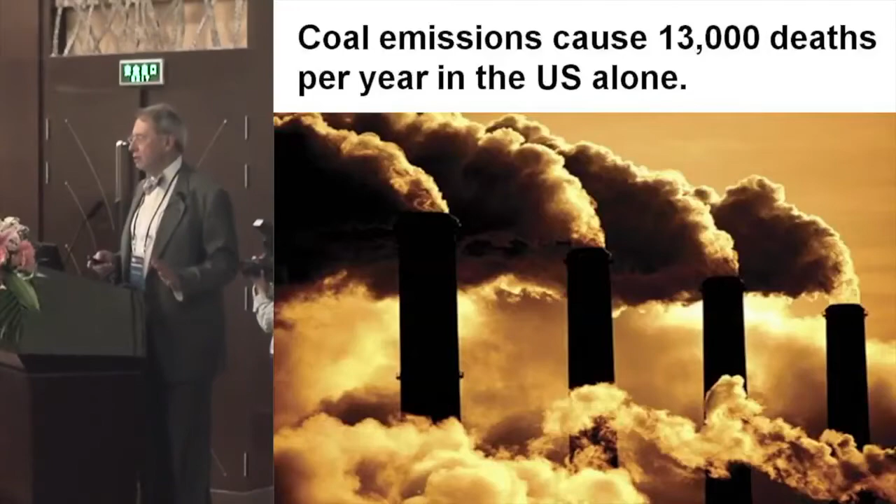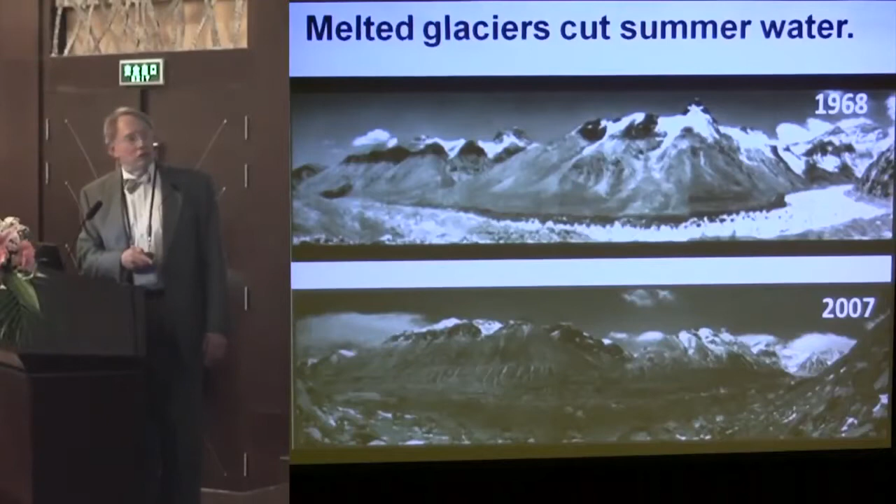One of the problems with global warming that I find the worst is the lack of food and water caused by the melting of glaciers. Glaciers normally retain water in winter and release it in summer, but the rivers fed by the Rongbuk Glacier are now becoming less able to provide water during the summer. Without water, growing food is next to impossible.

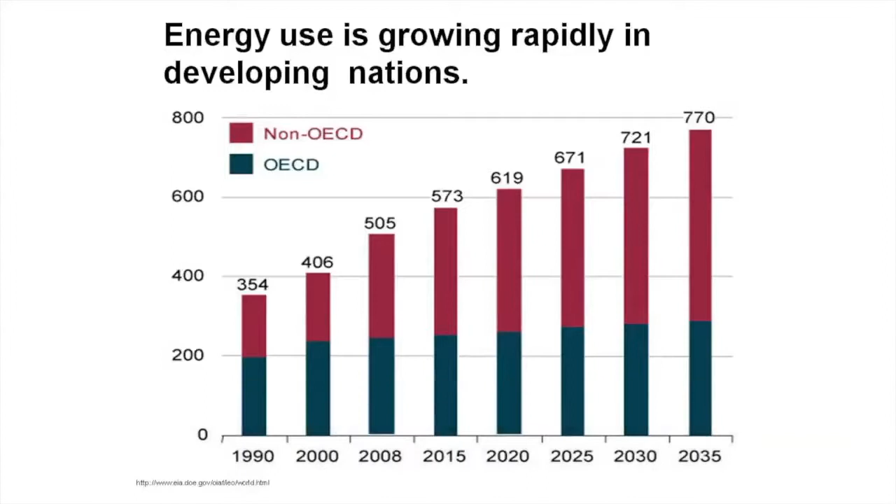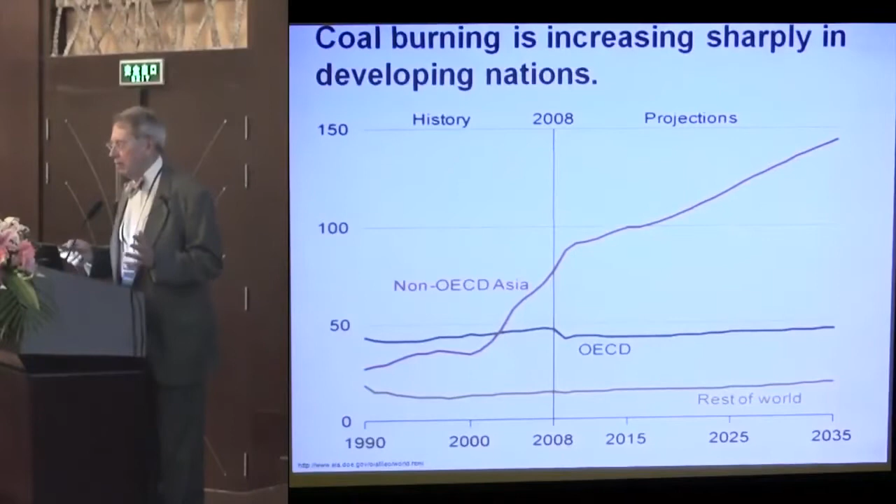All the developing nations know this. They wish to increase their energy use. And so you see the non-OECD nations are projected to have the most growth in energy over the next few decades. How are they going to do it? They're going to do it by burning coal, because they don't have money to build $5 billion nuclear power plants. They will use the cheapest energy source available to them because they desperately need that electric power.

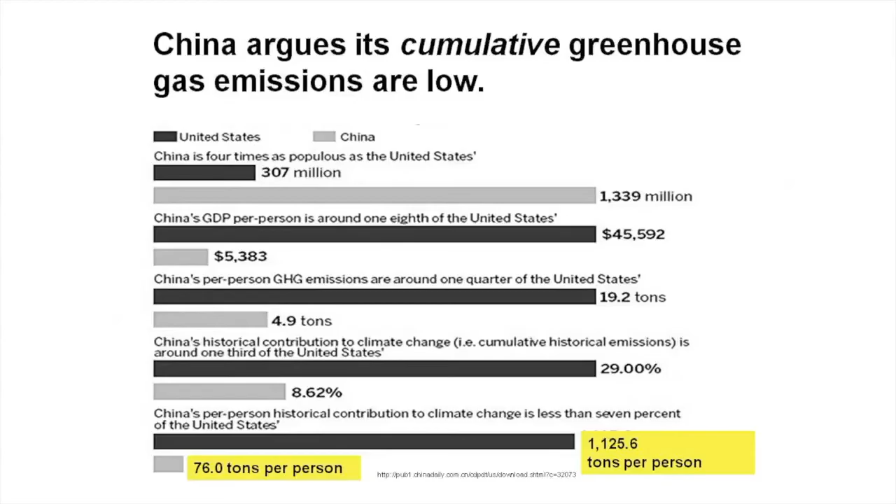Technology is required to solve this problem. They also argue against carbon taxes. Here's that same chart magnified. They point out that cumulatively in the US, we are responsible for about 1,000 tons of CO2 per person, whereas in China it's less than 10% of that. And so the developing nations argue that the West gained its prosperity by cheap energy, by burning coal and emitting CO2, so why should the developing nations be denied that right?

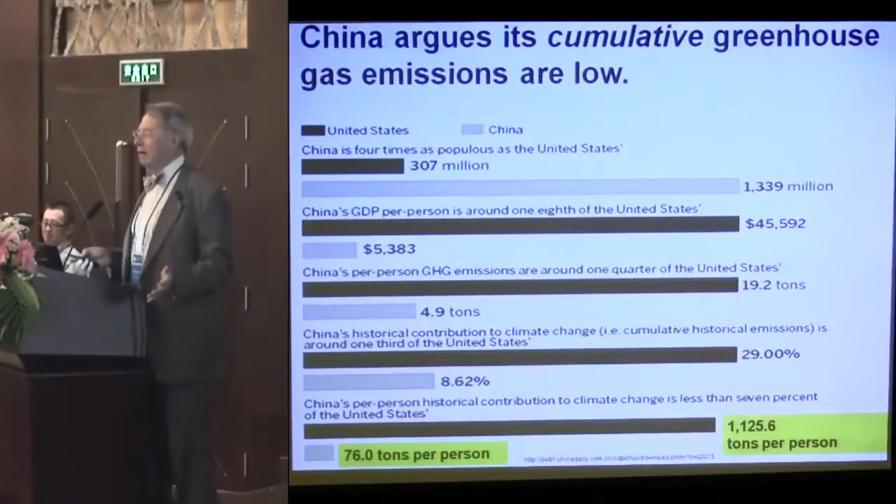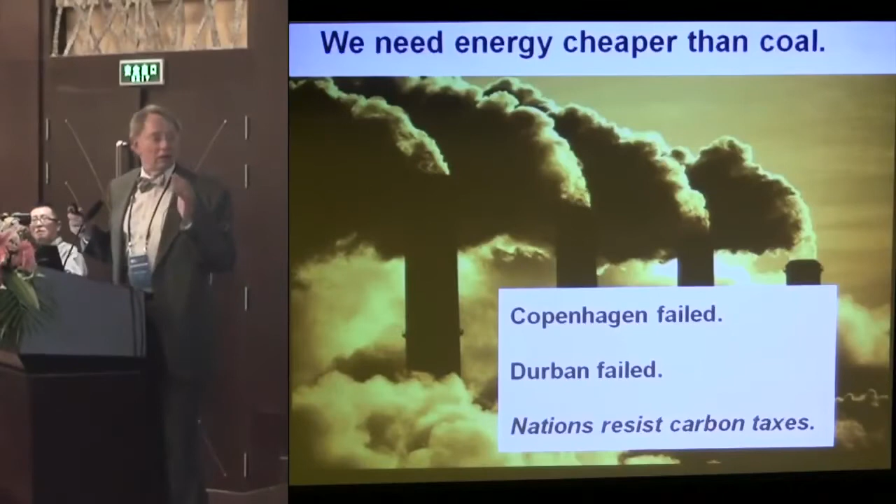It's not fair. I'm not trying to make that argument—I'm trying to point out that it's impossible to reach agreement on such a contention. So we tried anyhow. We had conferences in Kyoto, in Copenhagen, in Durban. Do you know 30,000 people went to the conference in Durban to negotiate a climate treaty? Well, how can 30,000 people agree on anything?

How can 7 billion people in 250 nations in the world agree to impose taxes on carbon that is against their individual economic self-interests on behalf of the whole world's stability? It's not going to happen.

So let's look at the cost of electricity from coal and other sources, because there's also a green movement that wants to replace coal. Here's the cost of coal: about...

$2.8 per watt of generation capacity is the capital cost for coal. In this talk I use a single model throughout, using the financial idea that if you do capital cost recovery at an 8% cost of capital over 40 years, operating a plant 90% of the time, you get 2.8 cents per kilowatt hour. So it's easy to remember: $2.8, 2.8 cents. That's the capital cost.

The fuel cost for coal is about $45 a ton delivered to the plant, which adds about 1.8 cents. So in this model, the cost of coal for a typical US plant is about 5.6 cents per kilowatt hour.

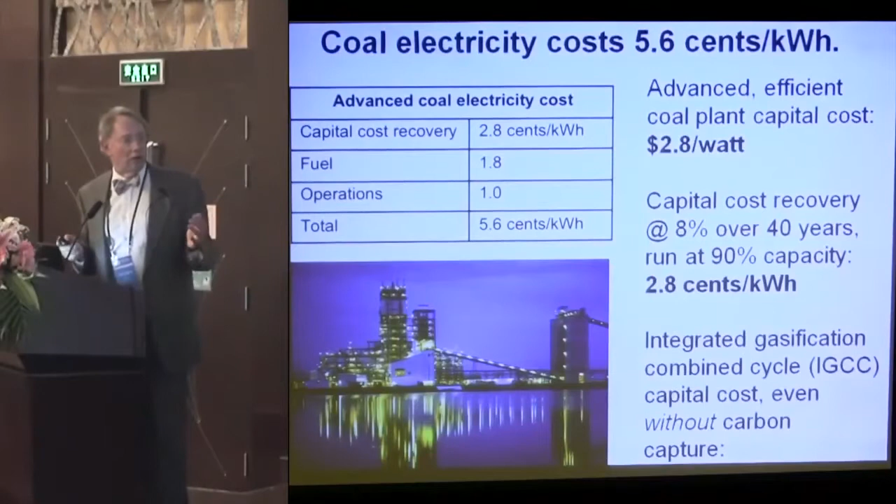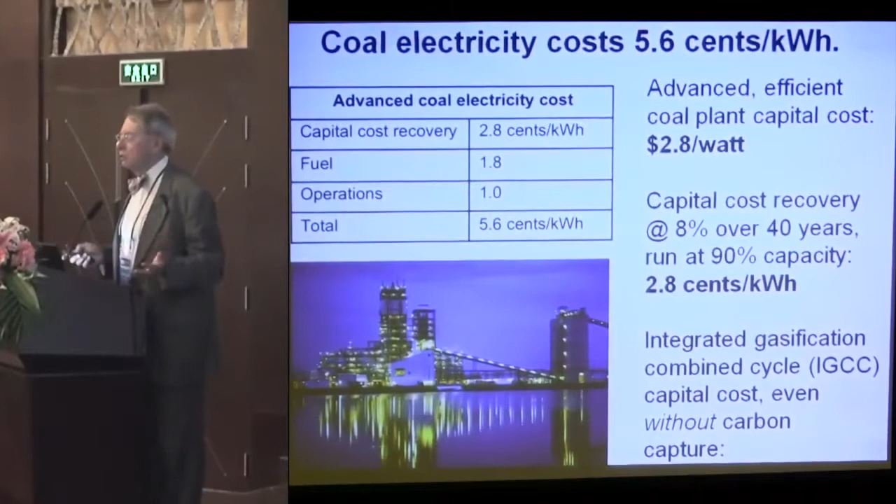Now people are saying, well, we have better technologies like integrated gasification combined cycle gas plants. These are coal plants that burn coal in oxygen rather than air, so the effluent is only water and CO2, and the CO2 can be extracted. But only one of these plants has ever been built in the US. That very pretty picture is the one in Florida.

And it's expensive. Natural gas is another interesting energy source. First of all, if you were going to do the best job you could, you would use a combined cycle gas turbine, which has a 60% efficiency of conversion from thermal power to electrical power. Buying such a thing costs about $1 per watt for capital costs.

I used fuel costs at $5 per million BTU to come up with a fuel cost per kilowatt hour of 2.8 cents. Our operations costs are standard in this model, and that comes to about 4.8 cents per kilowatt hour. Now, the cost of gas right today is a little lower than that, and if that were to persist forever, we could have a low cost of power from natural gas of only 3.7 cents.

But actually, we don't use combined cycle gas turbines very much. We only use natural gas combustion turbines, and that would mean it would be about 7 cents. So those are the bogeys we want to deal with.

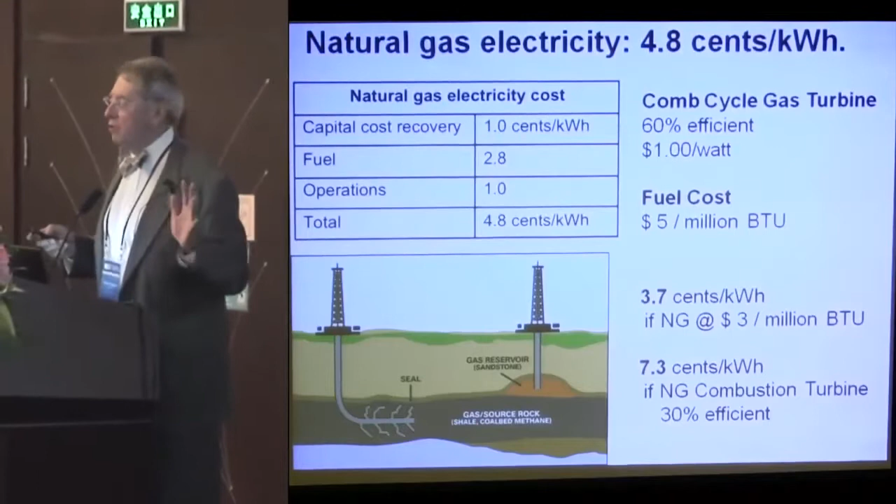Here's the reasons that natural gas prices will rise. Here's the prices of natural gas worldwide: in Louisiana, about $3; in Japan, about $16. Japan is importing liquefied natural gas more and more because they've shut their nuclear power plants down, and it has changed their balance of trade from a positive number to a negative one. So that really can't persist for long periods of time.

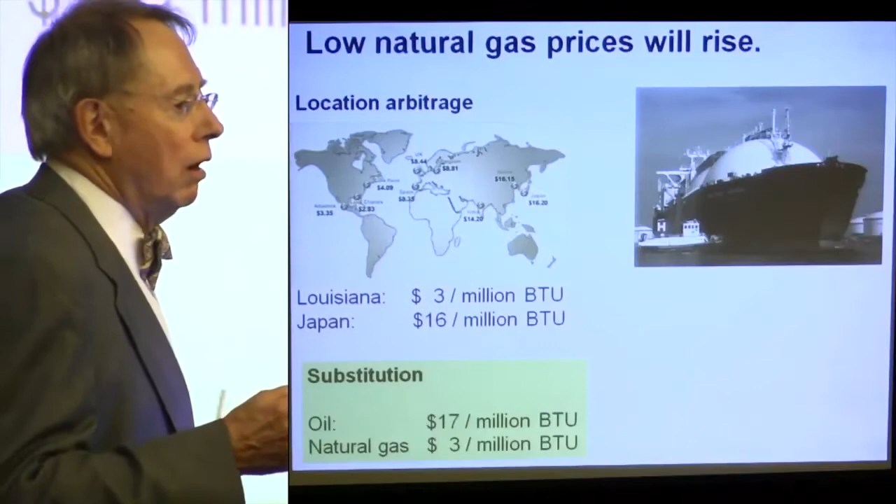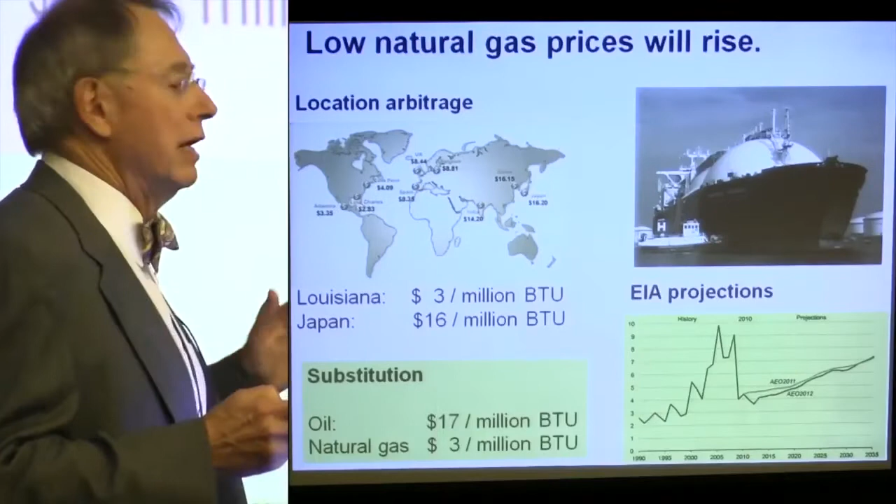Substitution: just look at the price per BTU of thermal energy from oil versus natural gas. There will be substitution, more emphasis on flex fuel vehicles, and that's going to drive up demand for natural gas and raise the price. Even the Energy Information Administration of the United States says it's going to go up. That's why I used $5 in my model.

Let's look at wind. Wind is integrally tied with natural gas. This number is pretty high, isn't it? Well, the reason is that it costs a lot of money to build these wind farms.

It's very hard to find the right costs. The costs are generally hidden from the public, so the public doesn't know the subsidies. But here are two examples: Deepwater Wind off the coast of Rhode Island, and Cape Wind off the coast of Cape Cod, Massachusetts. These are the costs per watt. But those capital investments can only be recovered in the 30% of the time the wind is actually blowing, so the capital cost per kilowatt hour generated is much higher.

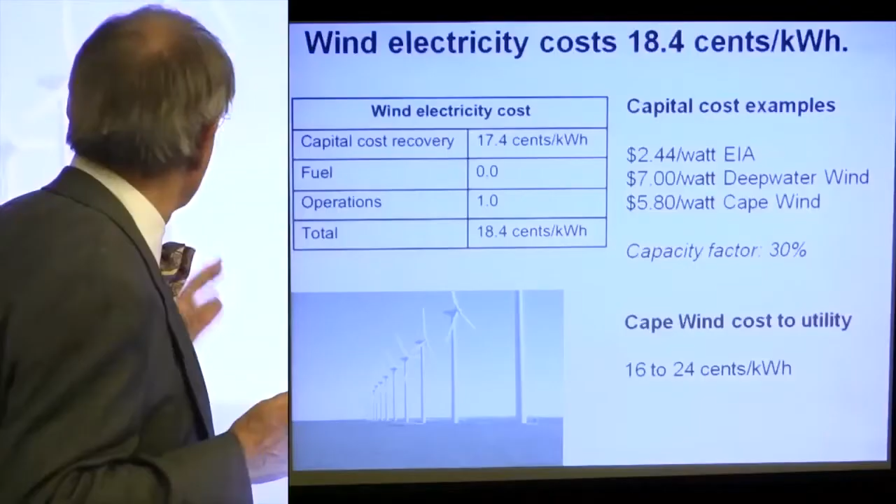It's 17.4 cents. Now the fuel cost is nicely zero. The ops cost I made the same for all of this model. I got 18.4 cents. I checked that against the real costs, and Cape Wind has negotiated a deal with the state of Massachusetts in which they will sell power at that price. So I say that model is about right. That's how much it really does cost, but they're going to hide that number from the ratepayers.

Now, wind turbines increase CO2 emissions. How can you say such a thing? Let me explain how. First of all, if you had hydropower available, you could use hydropower to back up the wind turbines during the lulls. So if the wind turbine is running 30% of the time, the hydro could run 70% of the time.

In most situations, there isn't enough water to run hydro constantly, so you only open the floodgates to run the turbines when demand is high. So if you had wind turbines coupled with hydro, you could save water in a sense, not emit more CO2. That's a good pairing - the kind of pairing that's done in Denmark with the hydro facilities in Scandinavia.

But I want to go back to the two kinds of natural gas turbines. The most common one is a combustion turbine, much like a jet engine. It is only 29% efficient in its conversion of thermal energy to electrical power, but it starts up quickly, in 10 minutes or under, approximately. So as the wind lulls, the natural gas combustion turbine is used to fill in the gaps.

The most efficient gas turbine is combined cycle, and that has a 60% efficiency, twice as good, but takes a long time to start up, almost an hour, because not only does it burn gas, but it also has to run the boiler with the output of the turbines. So it's a little more expensive, slow to start up, but a lot more efficient when it's running.

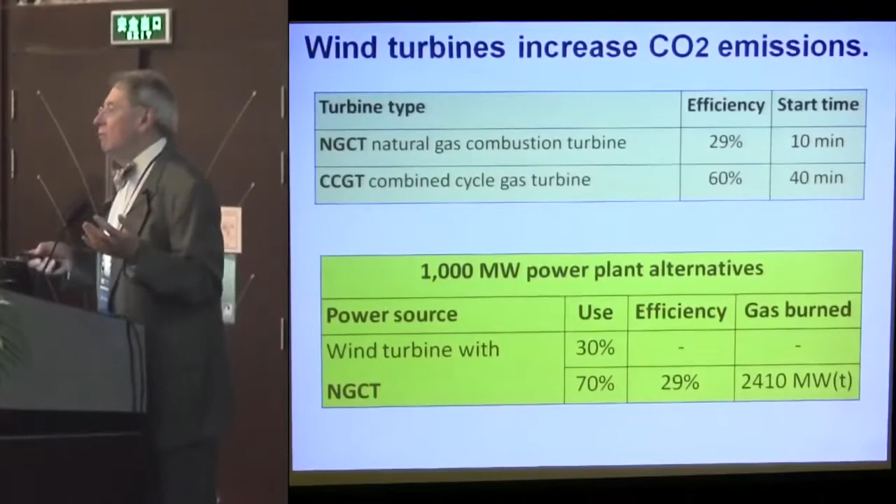Suppose I had only combined cycle gas turbines. Well, I'd be running 100% of the time at 60% efficiency or less fuel. So I deplete my resource less rapidly, I emit less CO2 by not having installed any windmills to begin with.

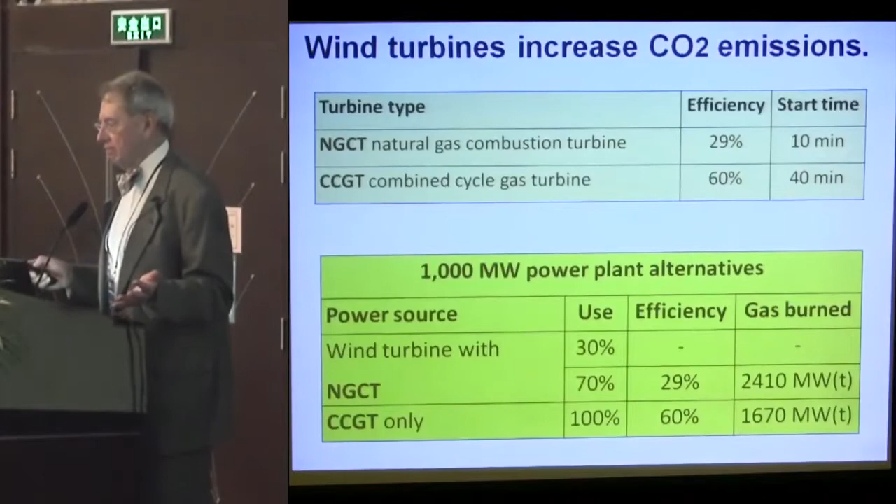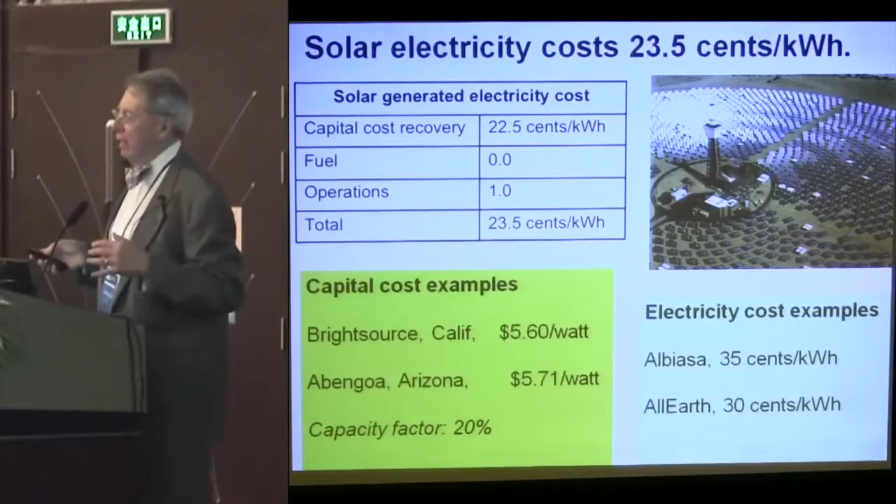So that leads to 22 cents, more or less, capital cost. So solar power, about 23 cents. Is that right? Well, here are some examples. Albiasa, a Spanish company that's building such a plant in Spain, 35 cents. AllEarth, a US company building one in Vermont, 30 cents a kilowatt hour. So those are about the right numbers.

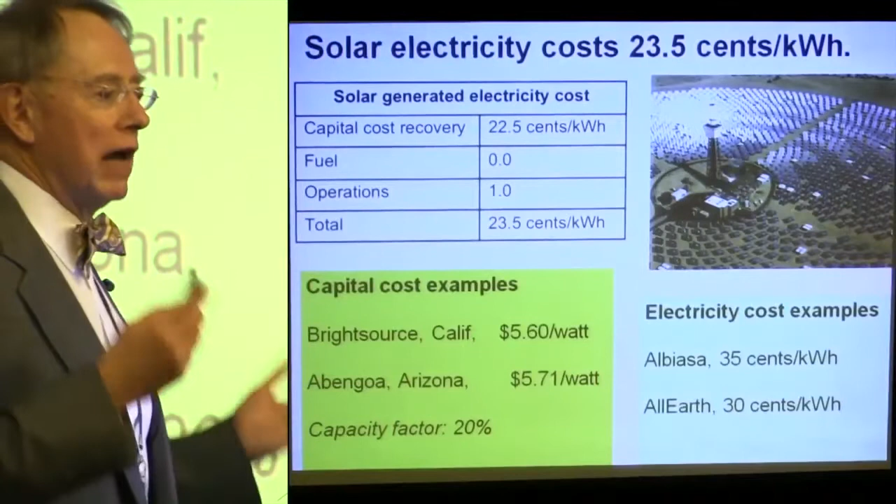The public isn't aware of them because they're hidden, averaged out over the whole bill. But what's important to society is not who pays, whether it's the taxpayer or the ratepayer or an unlucky investor like the government of Spain. What matters to society is the true cost. So let's look at those, and that's why we're doing this.

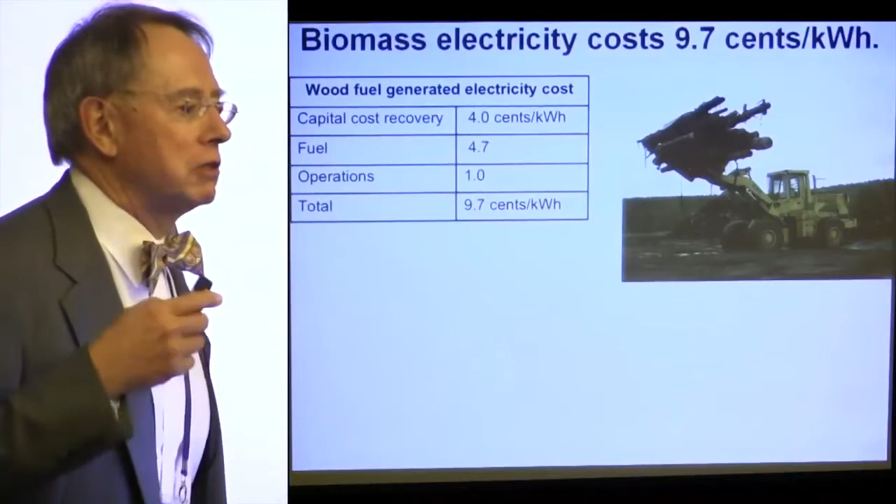Biomass. The cheapest way to use biomass is to burn it. We can talk about ethanol-powered engines and so on, but there's a lot of energy lost in the conversion of the biomass to ethanol. So let's just burn it - that'll give us the best answer possible.

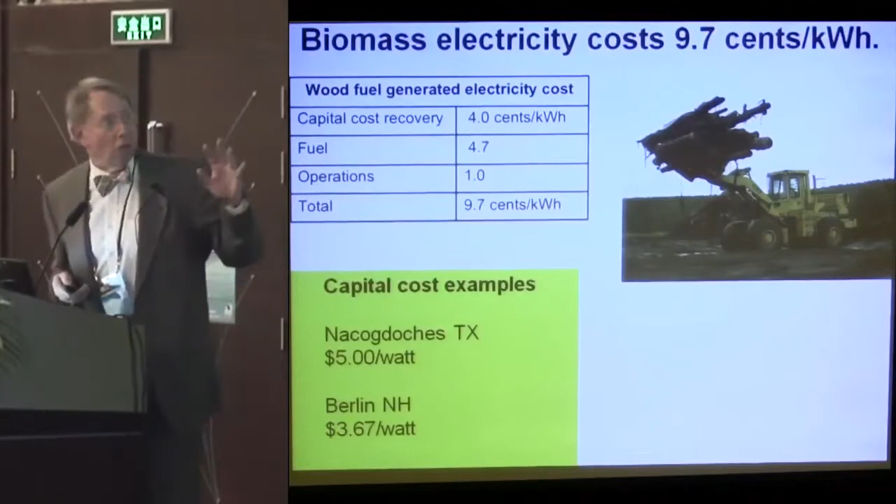Well, capital costs, I looked up for a few plants. I used $4 per watt to build a wood chip burning power plant, and I actually visited one. Capital cost recovery, you see 4 cents per kilowatt hour. Fuel - you have to drive trucks around to the woods to cut lumber and haul it back to the plant, cut it into chips, and burn it. Here are the typical costs. I convert those costs in tons to BTUs times the efficiency of the plant, about 4.7 cents per kilowatt hour.

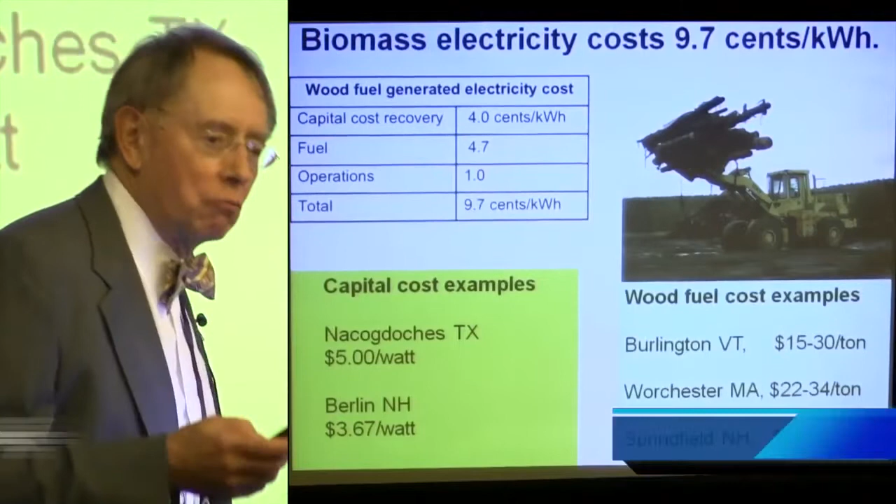Now, you might say, how do wood plants actually make money if they're selling it so expensively? Well, there are all kinds of rules in the United States, at least, about getting green energy credits that are marketed, renewable energy credits, to make it possible to do that.

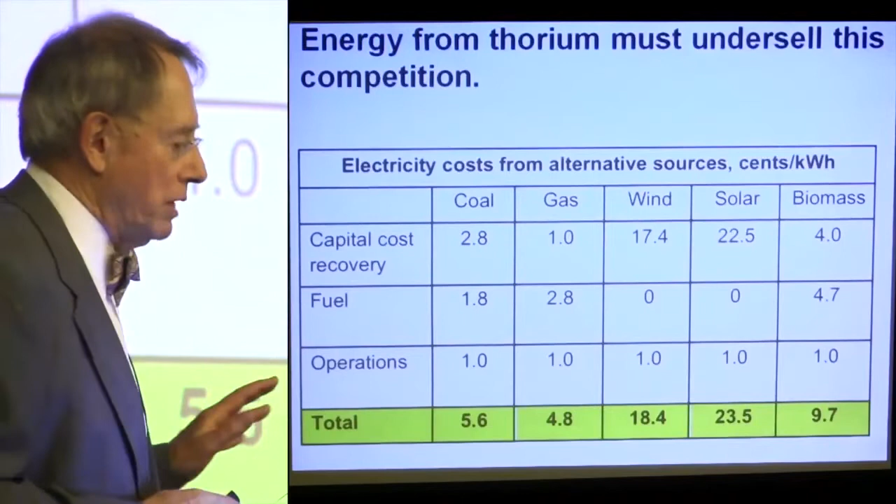So, if we want to save the world by underselling coal, here are the numbers we have to beat. And we might have to go as low as 4.8 cents for gas if, in fact, the gas prices never do rise. That's the bogey, that's our objective - undersell those numbers.

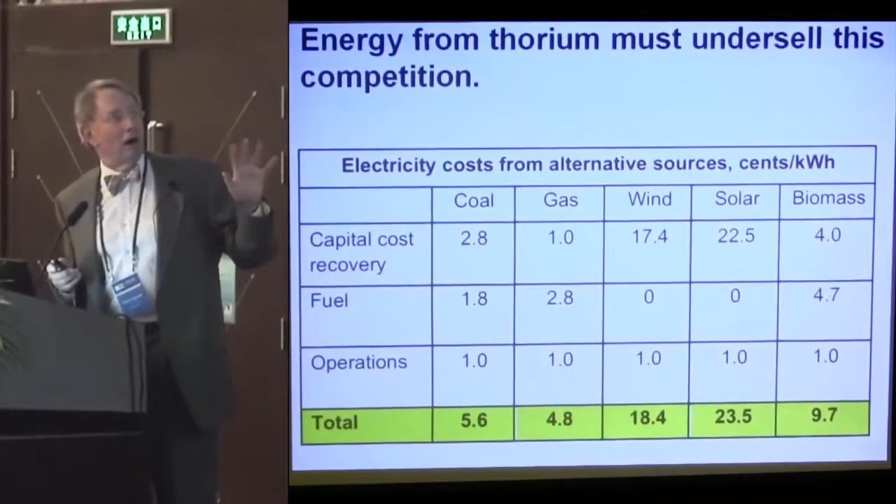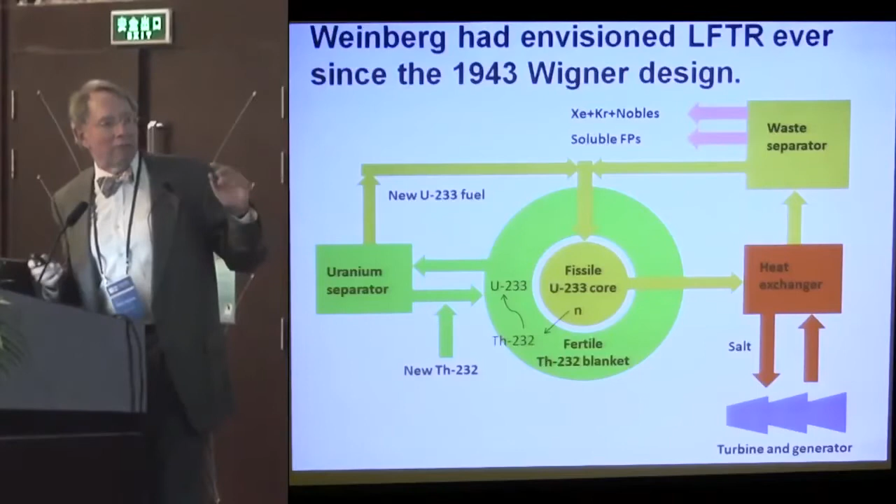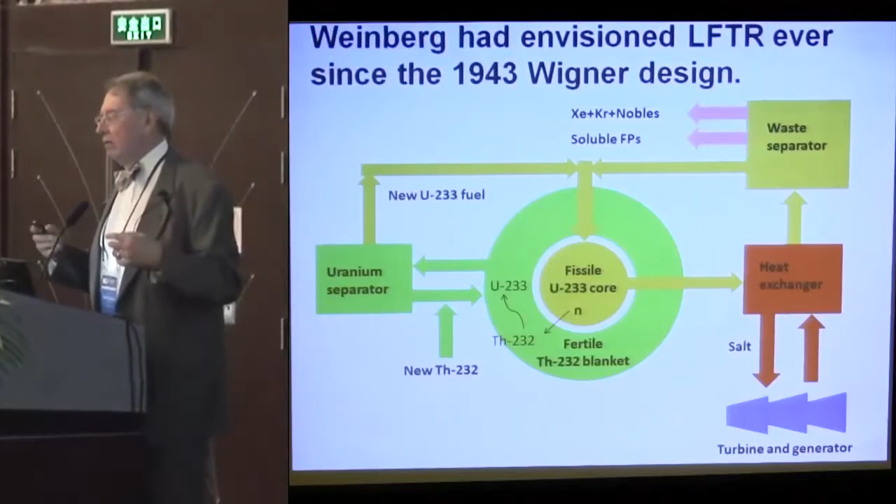Can we do it? Everyone in this room probably knows already how one of these liquid fluoride thorium reactors works. In this example, it's a two-fluid reactor that is fed simply by thorium, and it's sort of idealized, and it continuously processes the nobles, which are relatively easy to get out, and the fission products, which are harder to get out.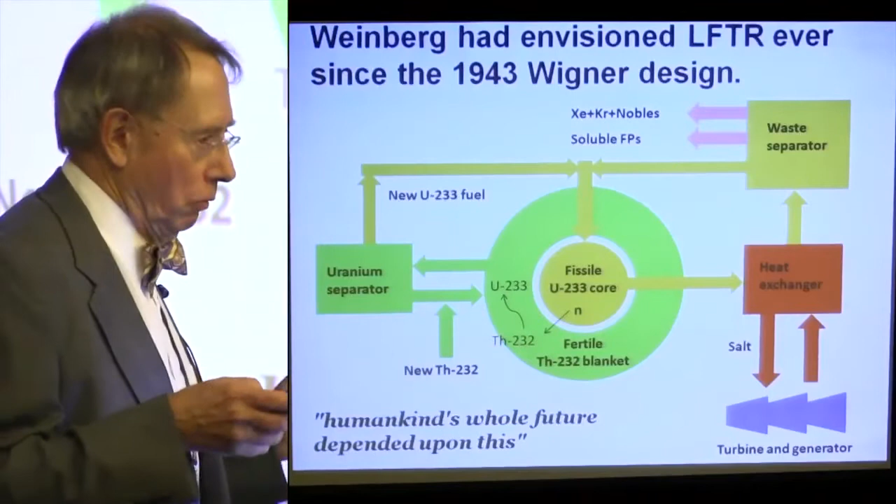Weinberg thought that the world's future depended upon such an inexpensive energy source. Weinberg himself wrote about global warming from CO2.

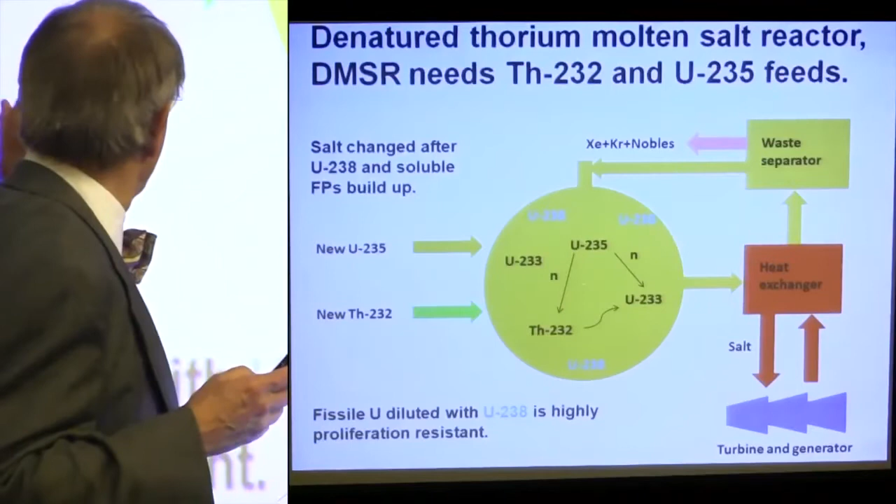There's an intermediate step that could be equally effective, a lot less expensive: the denatured molten salt reactor. It does not bother to process the dissolved fission product fluorides, but simply leaves them in the salt for 20 or 30 years until eventually they have to be reprocessed or perhaps just dumped and started all over again. In this example, it's fed with U-235, probably diluted in U-238 at a 20% level, and that works.

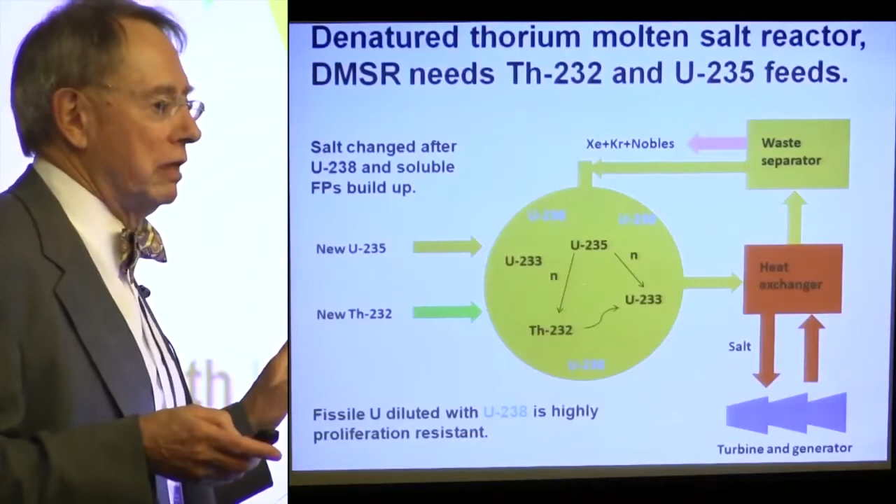Oak Ridge built one of these without the U-238. They ran it on U-235. They ran it on U-233. The advantage of U-238 is that this kind of reactor is probably the most proliferation-resistant reactor that you could scheme up.

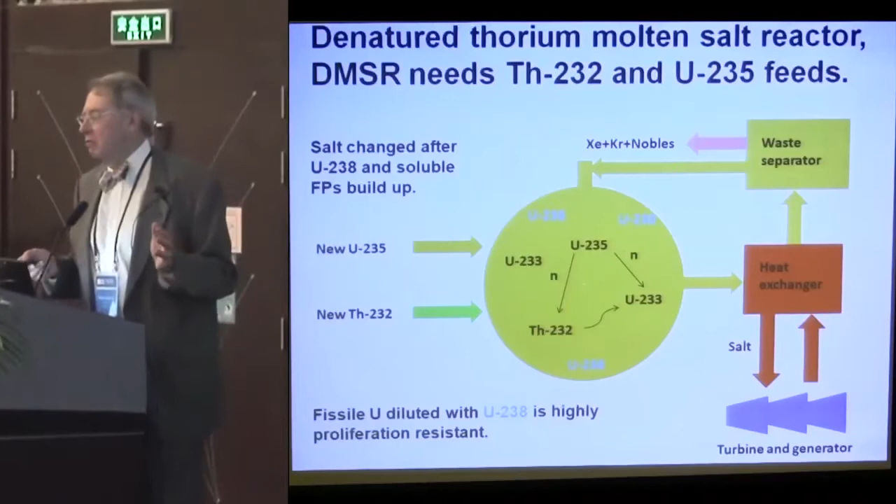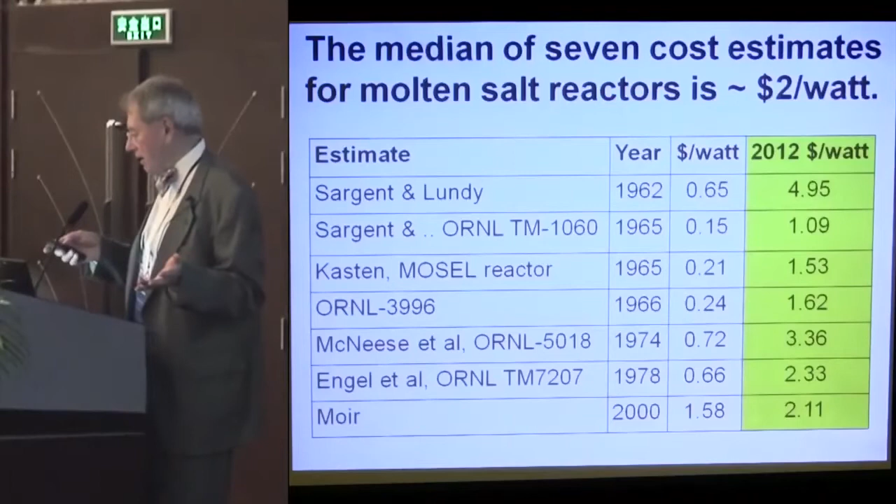Well, can thorium energy be cheaper than coal? That's what I want you to learn. The answer is, here are 7 proposals over the years to build molten salt reactors, and you can see $2 is a reasonable number for a target. These are real proposed numbers, inflated to current dollars.

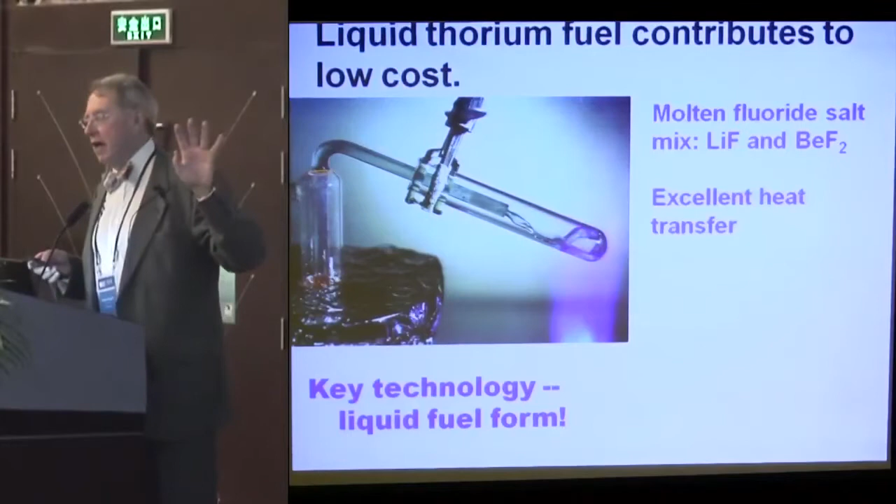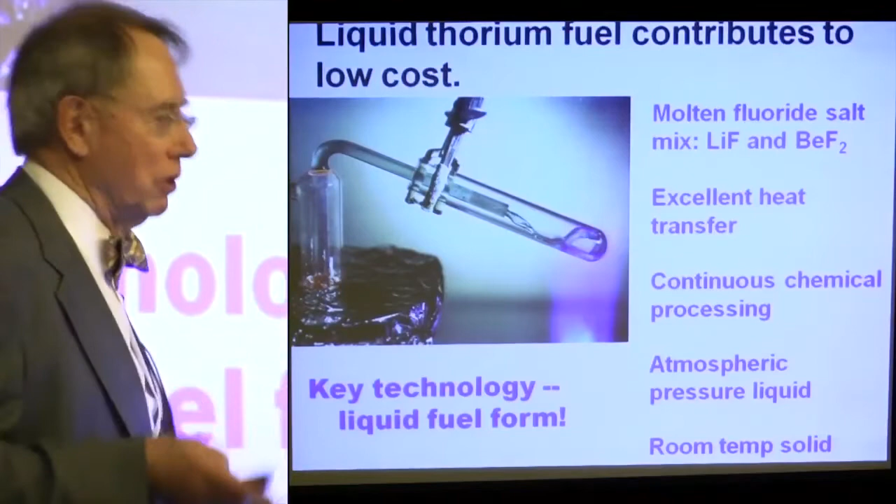The reason this technology is potentially inexpensive isn't the thorium so much, it's the liquid fuel form, because it has excellent heat transfer, allows continuous processing for fuel additions and fission product removals. It's an atmospheric pressure liquid, so containment is much simpler. And it's a room temperature solid, so if there's a problem, the particulates or the fission products and so on don't necessarily escape so easily into the environment.

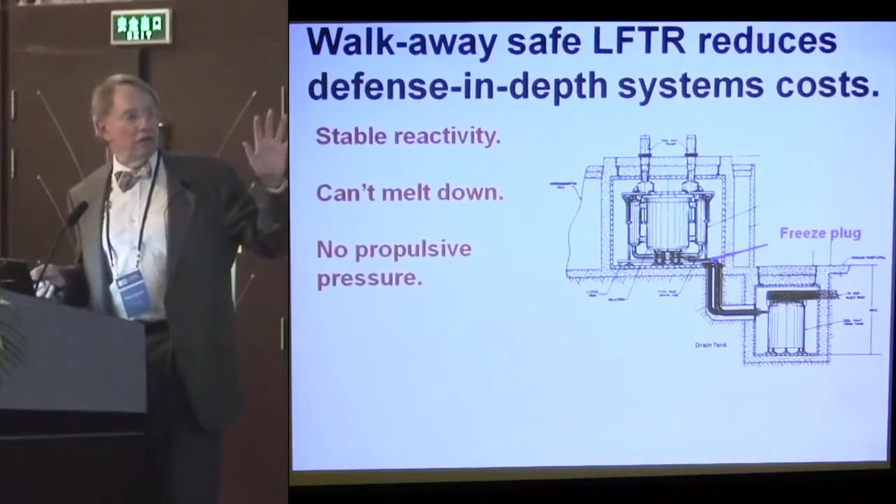The safety systems also contribute to the low cost. The reactivity is stable, makes it simple to control. It's a thermal reactor, unlike a fast reactor. There's no meltdown concept - it's as hot as it's going to get. There's no propulsive pressure to push reactive materials into the environment, and so on. There's no large containment dome. That saves money, saves mass.

Let's look at the waste product for a minute. Here's the process for converting Th-232 to U-233 by neutron absorption in a nuclear power plant, in particular a liquid fluoride thorium reactor. And if you were to let that go, eventually, by more and more neutron absorptions, you could actually get up to plutonium-239 and perhaps the higher level actinides. But compared to a normal light water reactor, it takes 6 more neutron absorptions, so it's much, much less probable to generate any of that long-lived, high-level transuranic waste.

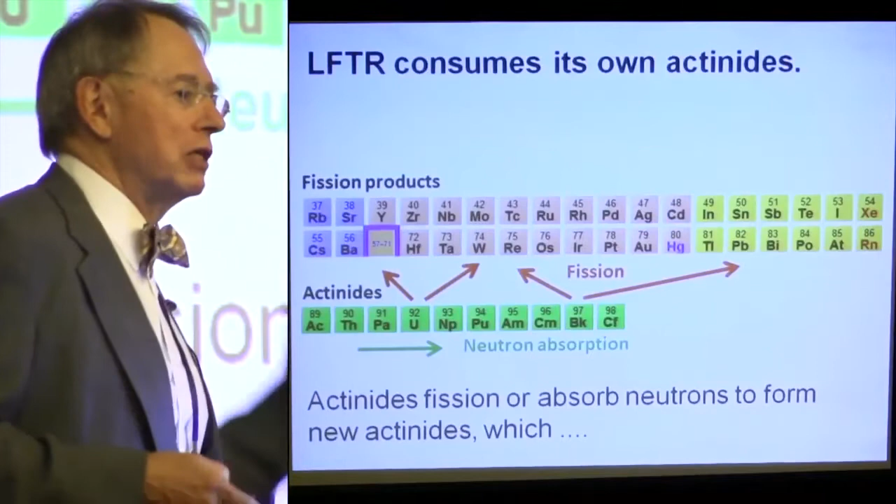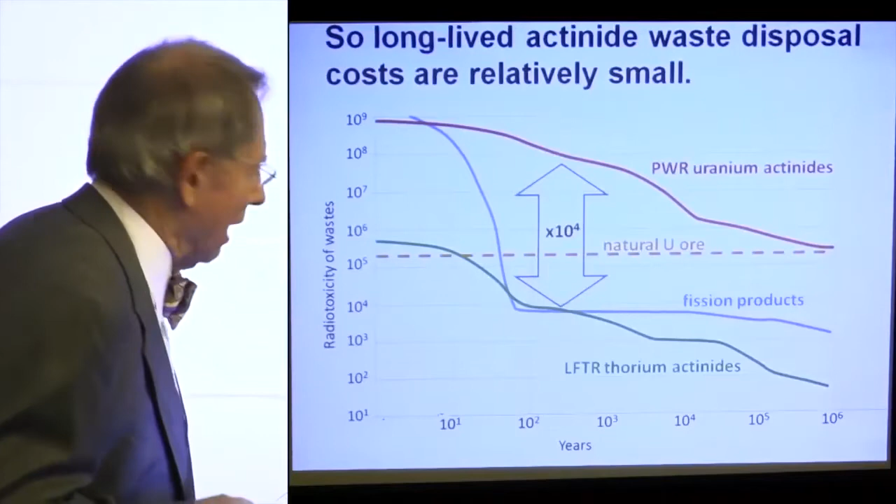On the other hand, if you had U-238 in the mix, that's one neutron absorption, and there you go. So that's the difference. These kinds of reactors, if you leave the actinides in solution, can slowly get rid of them by absorption and potential fission. It's not as good as a fast reactor, but such a reactor can consume much of its own actinides that are created. And the end result is, although the fission product waste for all kinds of reactors is about the same, and it has to be dealt with very carefully for 200 or 300 years, the long-lived actinide waste, at least from a liquid fluoride thorium reactor, is about 10,000 times less.

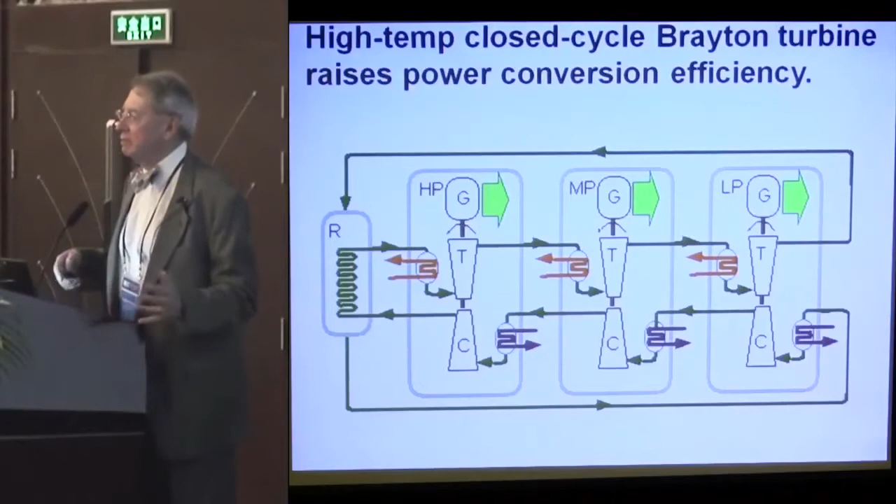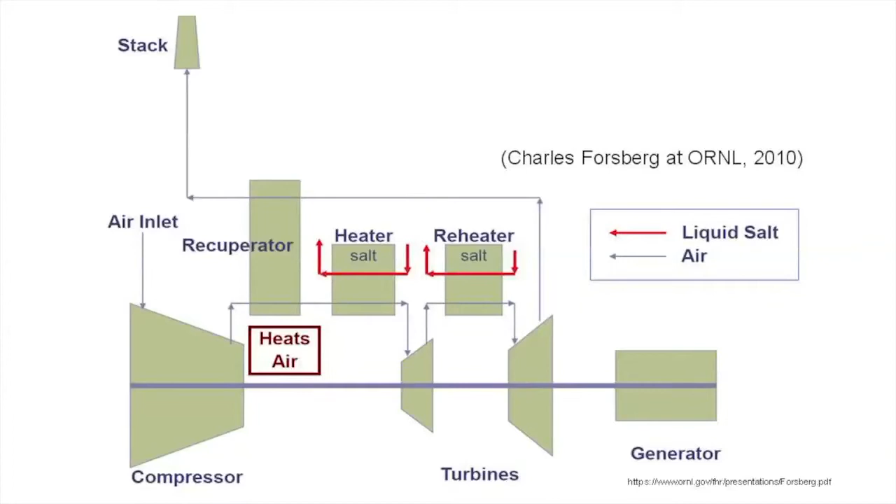Another advantage: high temperatures means that you can use a closed cycle helium Brayton gas turbine cycle with an efficiency of 45%, compared to a normal power plant efficiency of 33%. This means a lot less energy has to be discarded into the environment, which means cooling costs are lower. You can even use an open cycle Brayton system where you don't have any cooling water available at all. The efficiency drops to perhaps 40% for that.

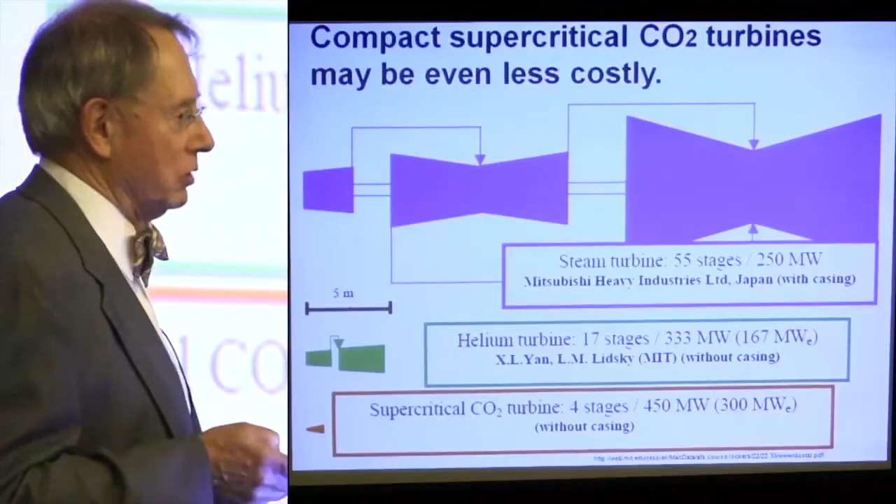There's a new technology that may beat both of those, and that is the supercritical CO2 cycle with a 45% efficiency at reasonably low operating temperatures. And you can see on the diagram, the little red turbine on the bottom is meant to represent the expected mass of the supercritical CO2 cycle. So that's another reason why this can be less expensive.

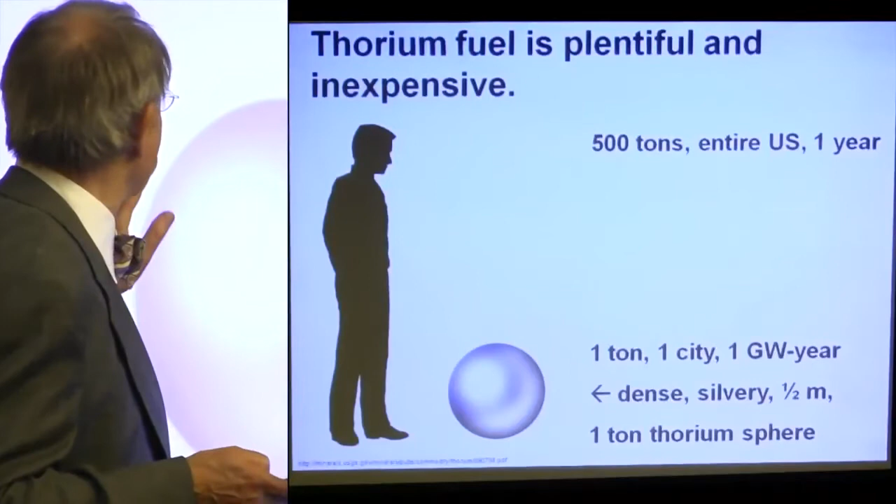And of course, thorium fuel itself is pretty inexpensive. Here's a 1-ton ball - that's about the right size of it. You could put it on your pickup truck. You could run the city of Boston for about a year. You could run the entire US on 500 tons. The government has 1,500 tons in storage, just sitting around in the desert.

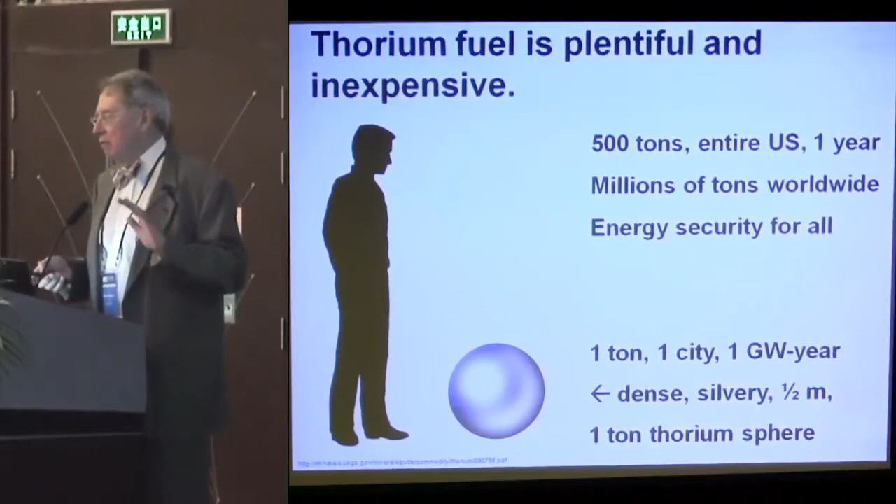There are millions of tons available worldwide, and there's enough thorium in every country that each country can be guaranteed some level of energy security. They can't be blackmailed by saying we won't give you the fuel. It's pretty inexpensive. Let's look for a minute about the idea of mass production of small modular reactors. My model here is Boeing aircraft.

They can produce a $200 million unit every day. Aircraft manufacturers have the same responsibilities as nuclear power manufacturers. They worry about corrosion, material fatigue, quality control, CAD, CAM, computer-aided manufacturing, all those kinds of things. Why can't we produce nuclear reactors the same way?

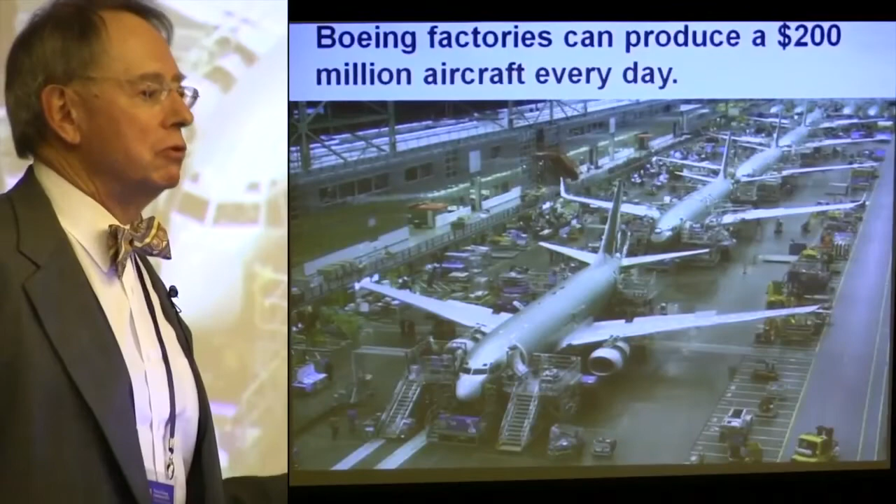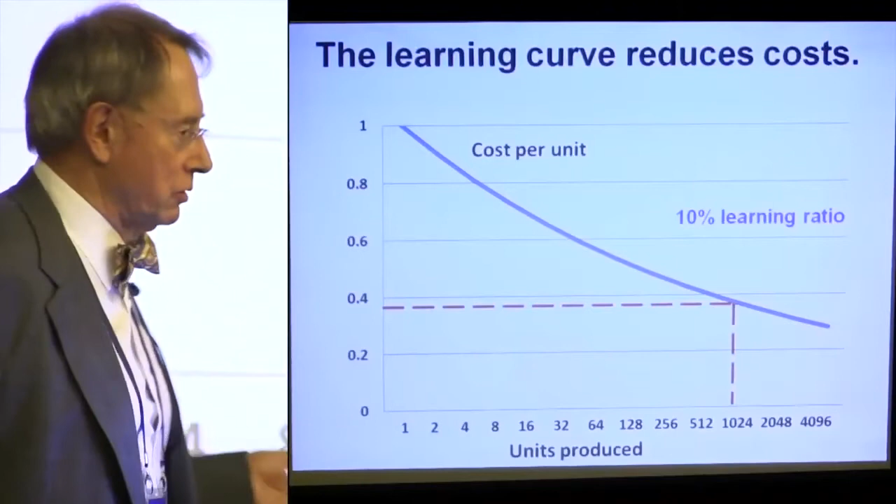Then we get the benefit of what's called the learning curve in manufacturing. This is not a theorem, but an observation that every time you double the number of units produced, the average cost drops by something called the learning ratio. In the early aircraft industry, it was about 20%. In the IT industry today, it's about 50%. The University of Chicago postulated it would be about 10%, which is pretty conservative, for the nuclear power industry. That's if we do mass production of essentially the same units. So look at that, we can drop the cost to, what, 40% or so after 1,000 units of production.

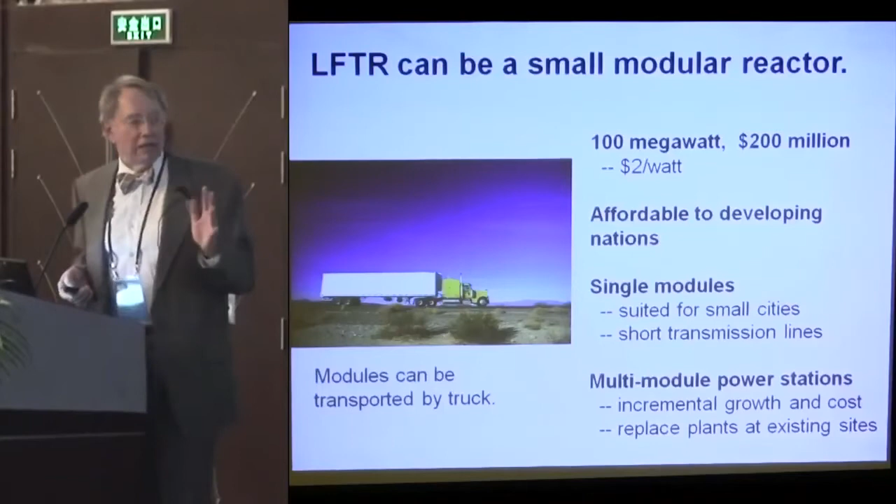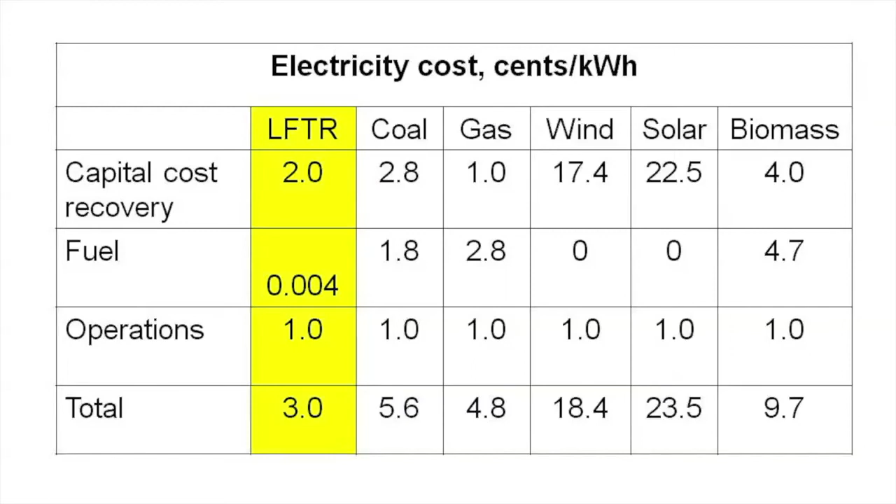So I say, learn to develop small modular reactors at about $2 a watt, about the cost of an airplane, $200 million. Make them affordable to developing nations that can't put in a $5 billion reactor. We can use small ones near cities. We can gang them together for bigger power stations. We can allow them to be truck transported. If we do all that at $2 a watt, the cost of fuel is nothing. I use the same number for operations as before. We can hit 3 cents per kilowatt hour, and we can undersell all the competitive technologies.

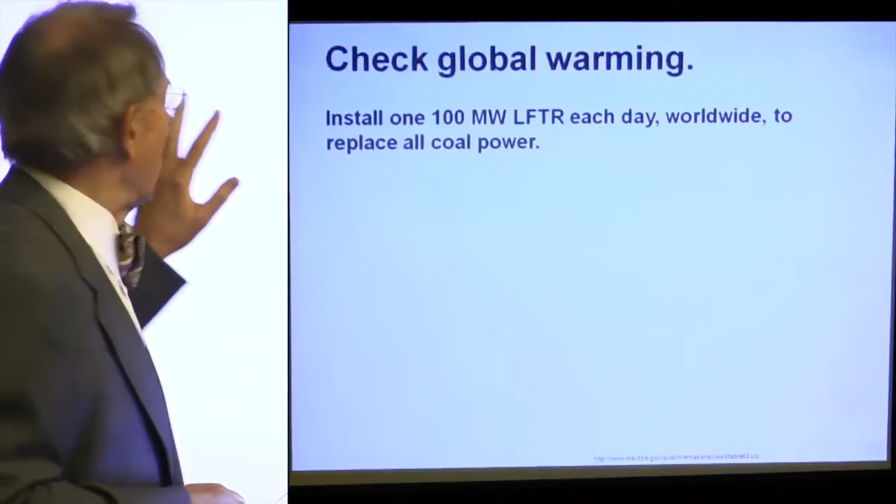If we do this, then we can create a new industry. I'm advocating about $1 billion investment in the development stage for R&D that becomes public domain, another perhaps $5 billion of industrial investment to develop the production capabilities, and then the process of producing and exporting one a day. What if we do that? What will happen to the CO2 emissions? We could eliminate in 38 years all the coal plant emissions, all of them. All we need to do is produce one a day.

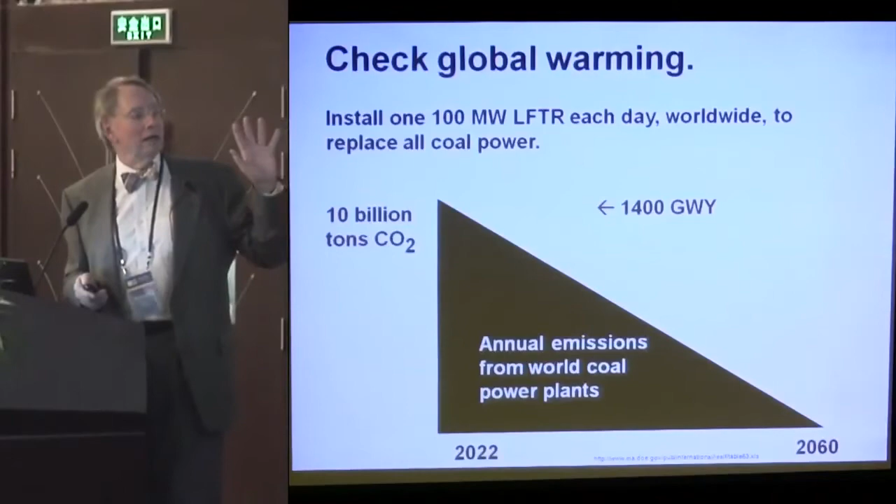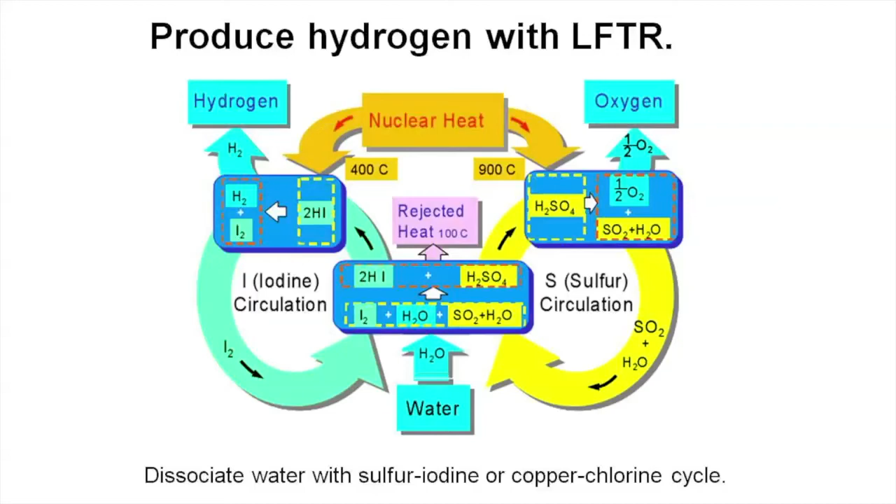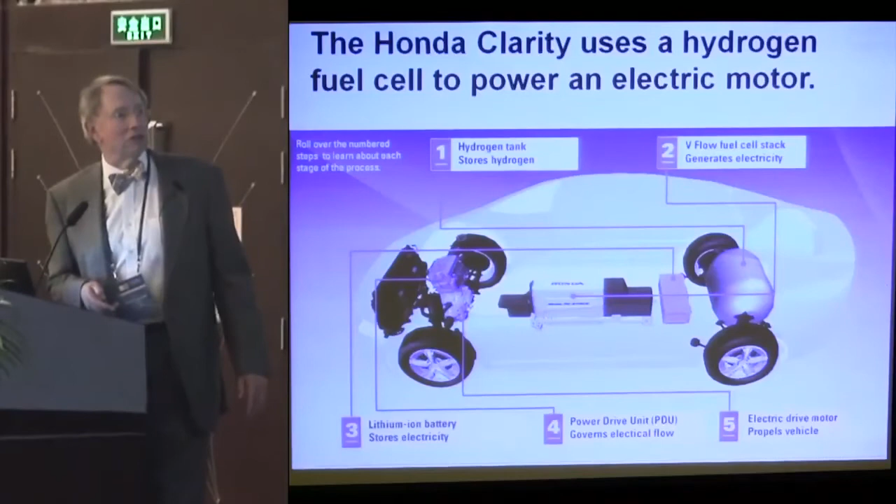Having solved that problem, what do we do about fuels for vehicles? With only 650-degree heat, we can get about 45% efficiency, conversion from thermal energy to chemical potential energy for burning hydrogen. There are actually hydrogen cars available. The Honda Clarity can be purchased in California today, if you live near one of the dozen or so hydrogen fueling stations. So they do exist. Ford Motor Company did an internal combustion engine with hydrogen.

But hydrogen is not an easy thing to deal with. For one, you have to compress it or liquefy it in order to carry it on board a vehicle. And even when you do that, it's not nearly as energy dense as these other kinds of fuels: ammonia, methanol, which is a gasoline substitute, or dimethyl ether, which is a diesel substitute. So let's think about carrying that hydrogen with carbon and nitrogen.

First, look at ammonia for a minute. More than 1% of the whole world's energy is used to make ammonia. It's used principally as a fertilizer. A third of the lives on Earth depend on food that's grown from ammonia produced this way. And it's produced now from natural gas. But we can also use ammonia to fuel an internal combustion engine.

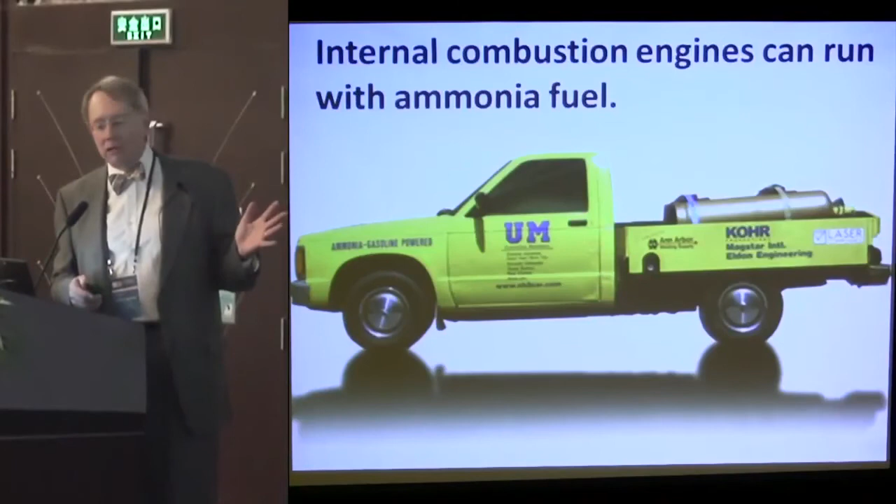This is a University of Michigan experiment. There's a guy in Canada who has a car that runs on this. It's certainly possible. You can even use ammonia to run fuel cells. These solid oxide fuel cells are sort of laboratory scale now. There's no industrial capability to do these kinds of things.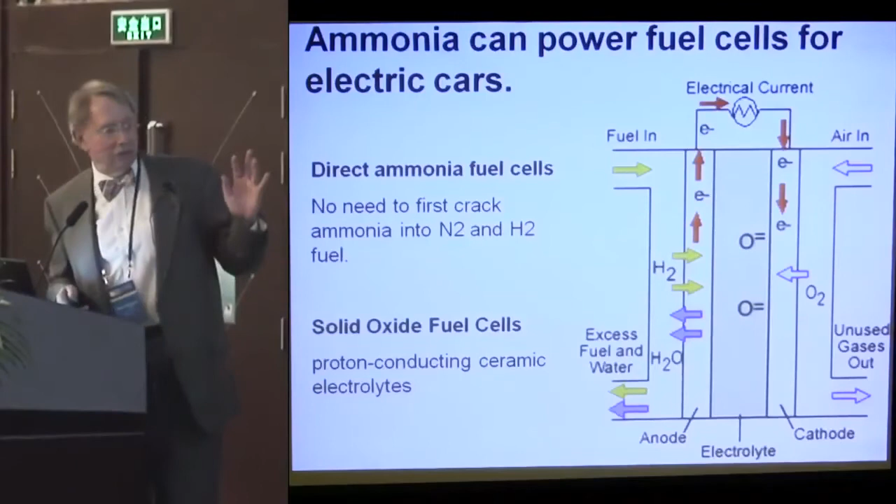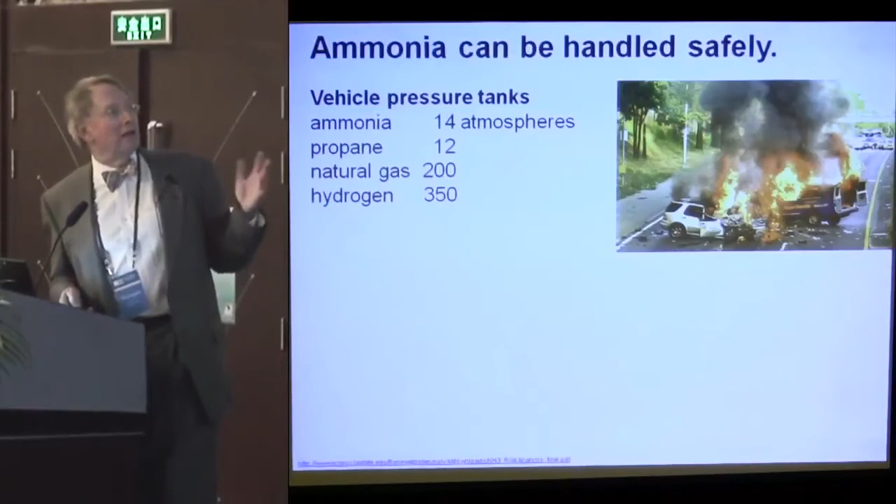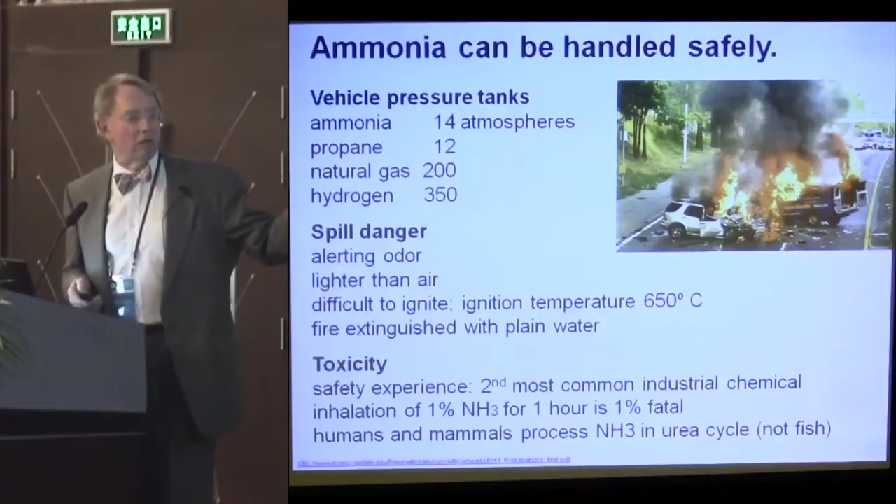And ammonia really can be handled safely. People say, oh, it's poisonous. Well, gasoline is explosive, you have to look at what all the risks are. Here are some examples: we'd have to pressurize it to about the level of a propane tank. Natural gas and hydrogen are pressurized to much higher levels. There is a spill danger, but you can smell it. It's difficult to ignite. It is toxic, so you don't want to breathe concentrations of it for a long period of time. There's no low-level toxicity risk because the human and mammalian cycles naturally excrete urea. It is toxic to fish, so you have to be careful. There was a report done in the Midwest comparing the risks of ammonia and gasoline fuels, and although they're different, they're about the same.

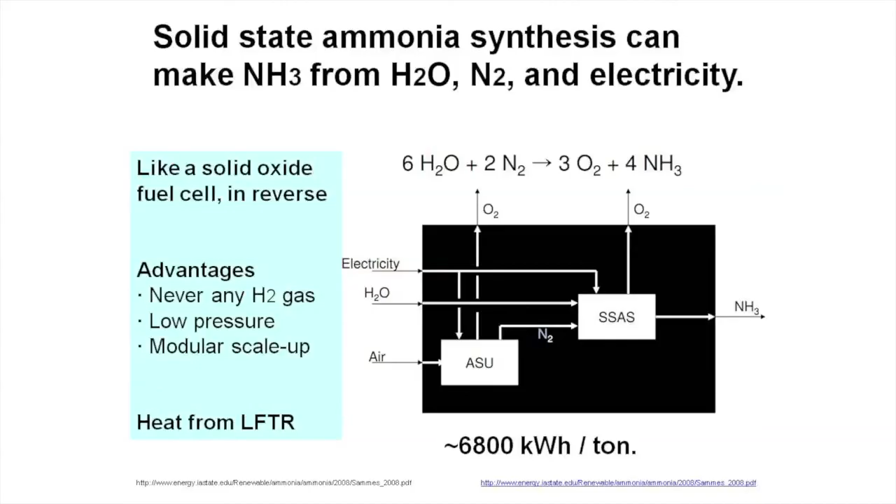Now, we can make ammonia from solid-state synthesis. It works kind of like that solid oxide fuel cell in reverse. Again, lab scale. The NH3 Fuel Association did some papers on this. They estimated, and we adopted it, about 6,800 kilowatt hours of electric power are consumed per ton of ammonia produced by this process. It helped a little with extra heat.